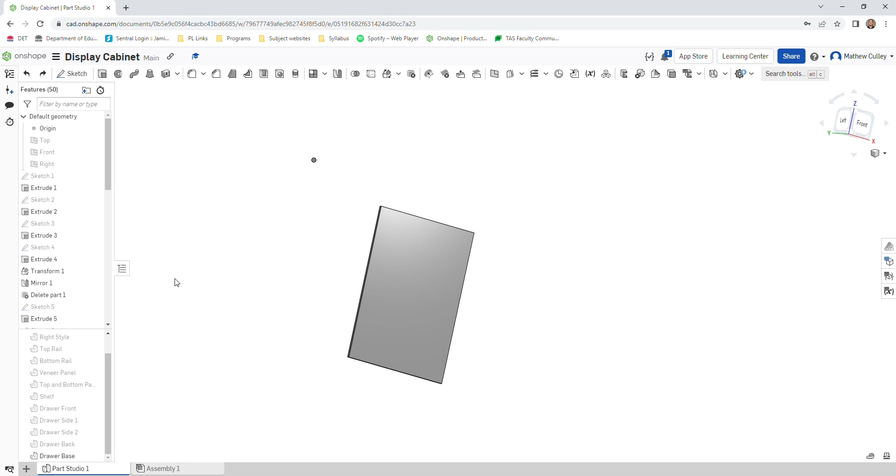Now that you've got all your parts drawn for your drawer, we're going to go ahead and start to assemble that in the Assembly Studio. So we'll jump into the Assembly Studio here.

Zoom out, just need to insert all our components for our drawer. So drawer back, drawer base, drawer front, drawer side 1 and drawer side 2, and green tick.

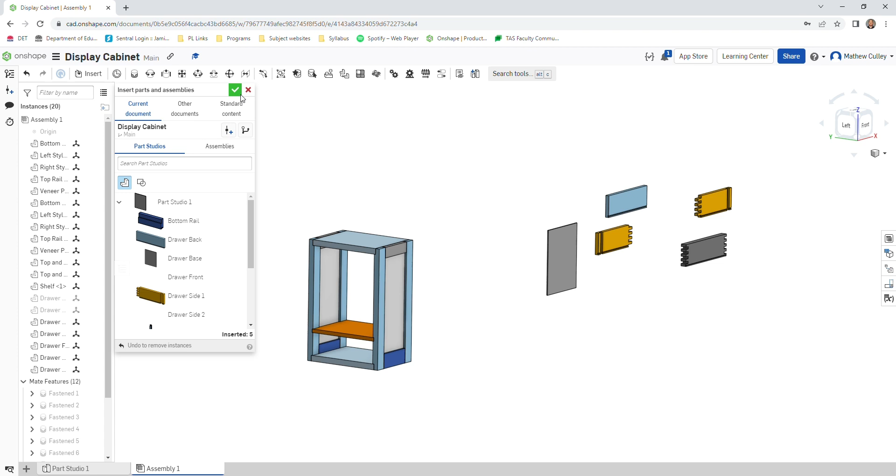Now I can already see that there is a slight issue when I look at this. I can see there's something not quite right with these housings. It looks like this one might be wrong.

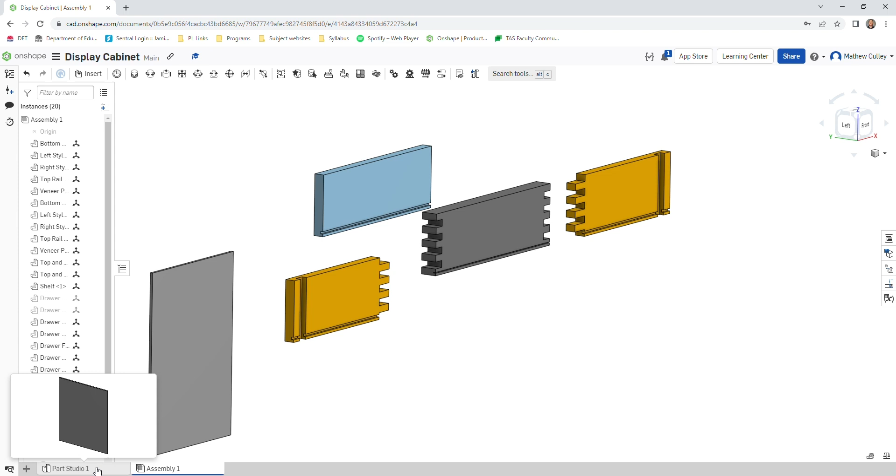Okay, so we'll just quickly, before we go ahead and start to assemble that, jump back into our Part Studio and have a look at what's going on with the drawer front there. So hide our drawer base. Here's our drawer front.

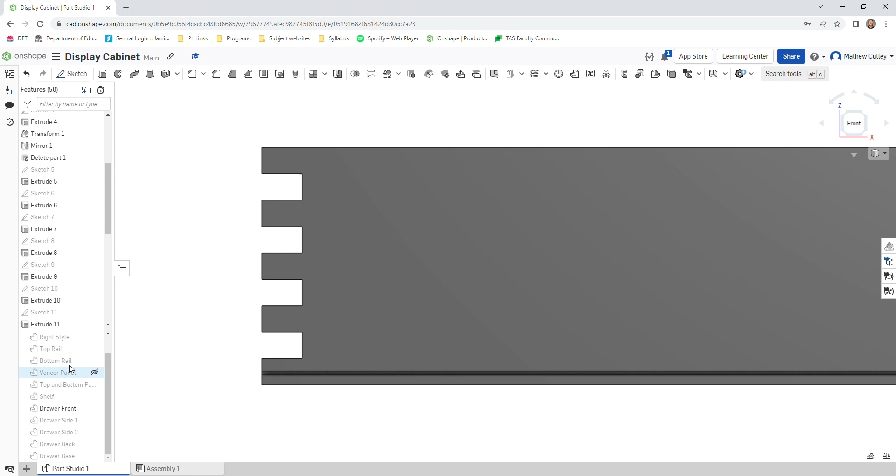We can see that this is a little bit thin, it's not quite right. So if I select my part there, looks like it's sketch 15. So I'm going to double click on sketch 15.

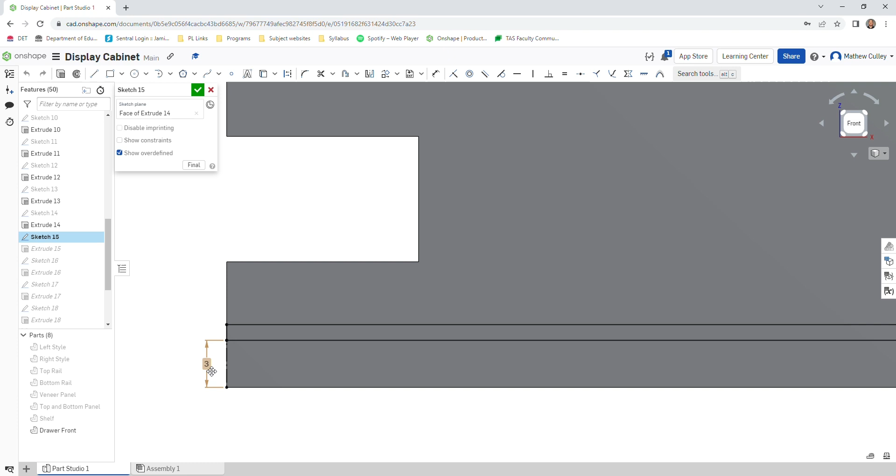I'm going to go in and start to edit this. So just going to delete these lines of the rectangle. Zoom in over here, delete.

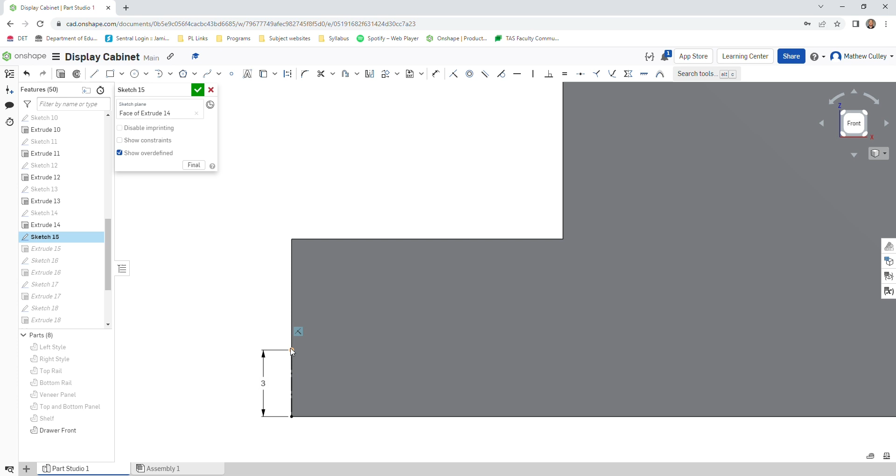Come back into my 3mm construction line here. G for my corner rectangle, left click once. Come all the way across to the other side, left click on the yellow line. 228, which is what we want, 228, enter. And we want 3mm, enter.

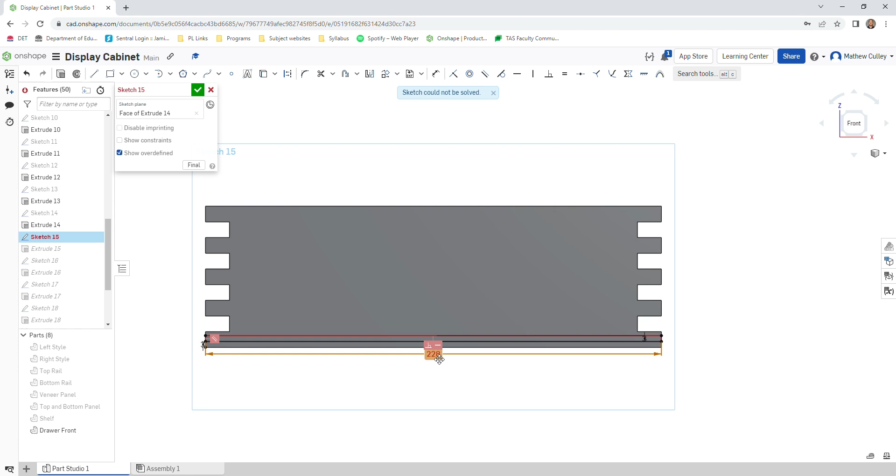Escape. Click on this dimension here, left click once, delete. Okay, it's now solved our sketch and it's saved at 3mm, which is what we want.

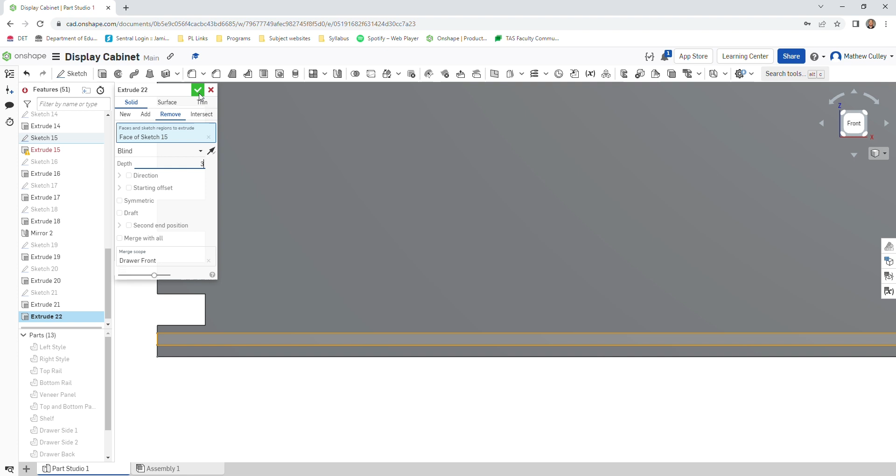So left click on the rectangle, left click extrude, remove, and we make this 3mm. Click our green tick, and there is our 3mm housing done. So we go back into our Assembly Studio now, and we can see that that housing is

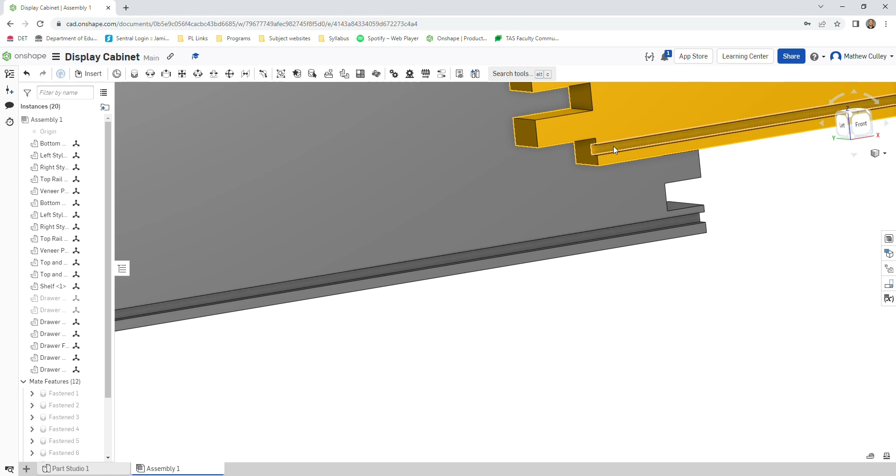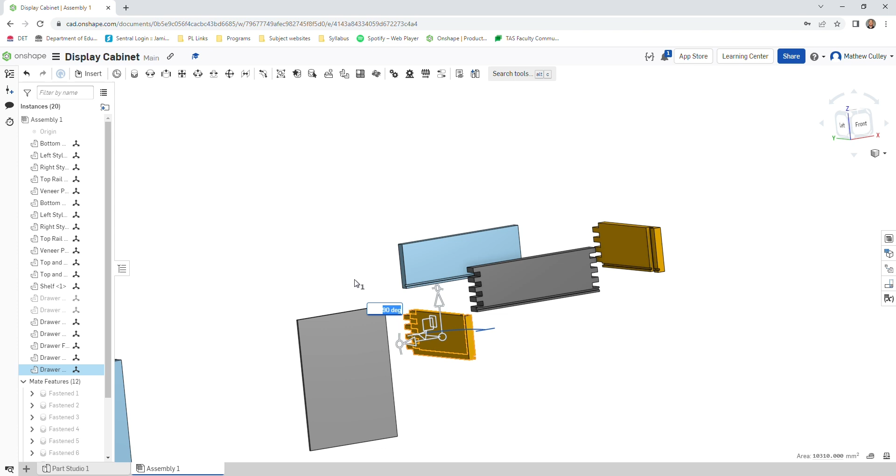roughly the same size, well it is the same size as our drawer sides. So before we get started in assembling, we're just going to quickly rotate all our parts here, just so they're orientated the right way. Just makes life a little bit easier when we go to do all the fasten mates.

So I'll just drag this one over, rotate that 180 degrees, and then our drawer base. 90. And 90. Done.

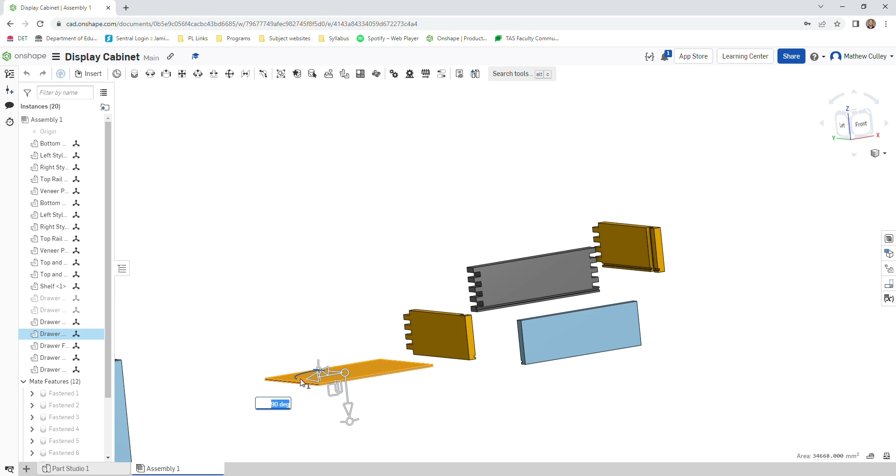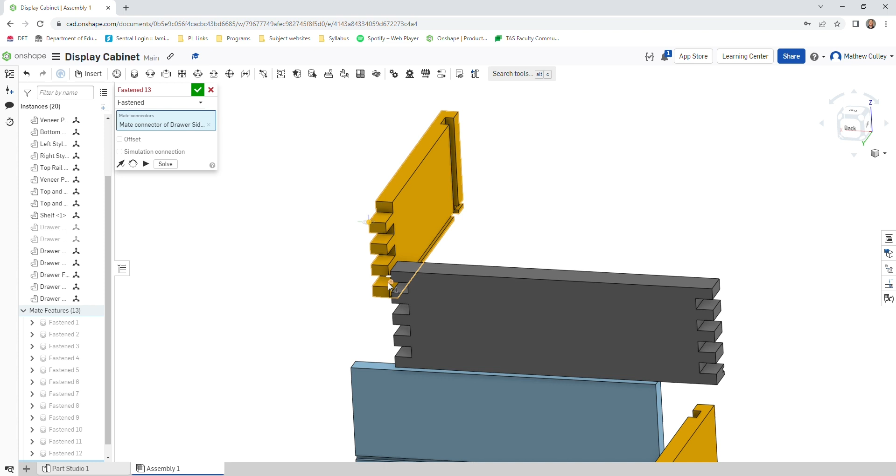So first thing we can do is M for fasten mate. Just zoom in here. We'll connect this corner here with our blue axis pointing up to this corner here with the blue axis pointing up, and solve that. We can move on to

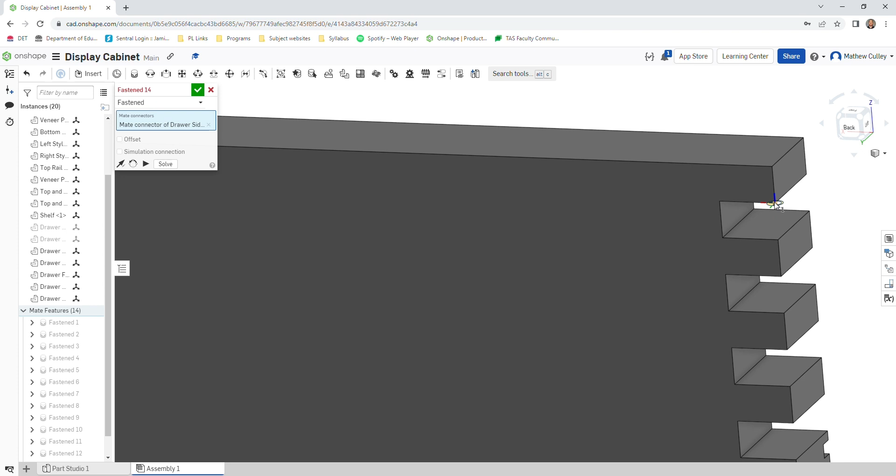this one here, blue axis pointing up, and that will go into this corner here with the blue axis up. Solve that.

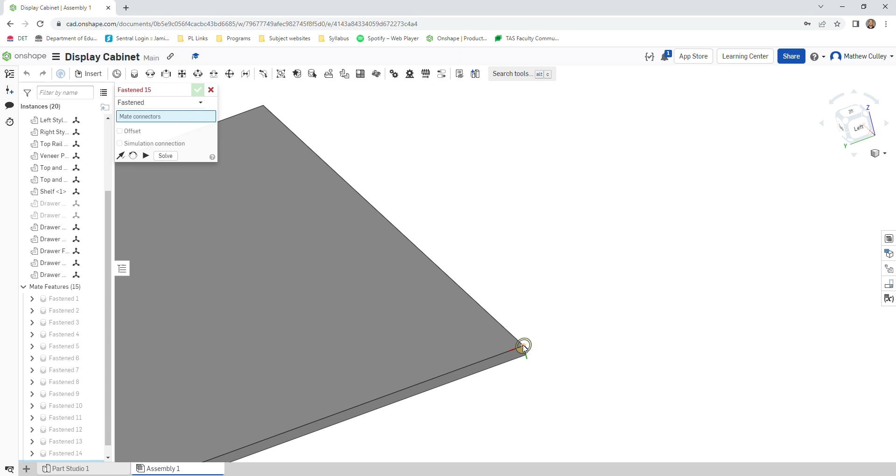Okay, I'm actually going to put the base into the back of the drawer first. M for fasten mate. Come in down here. Try and get that blue axis pointing up. And we want that in that corner there. And that works.

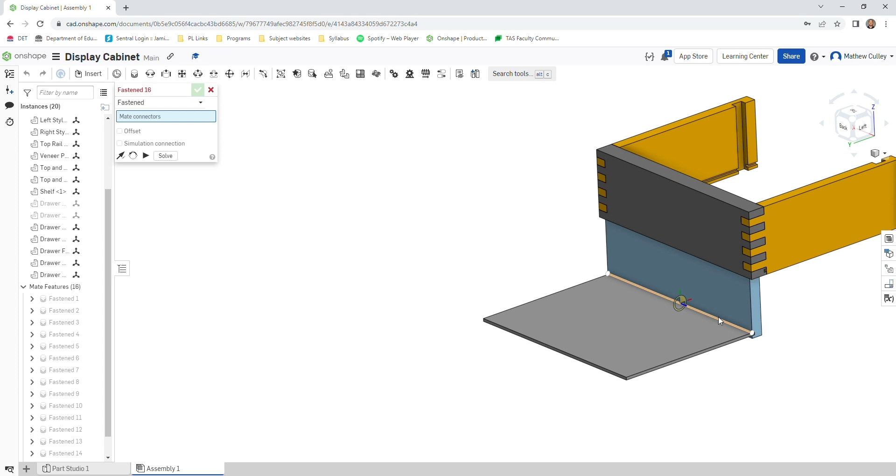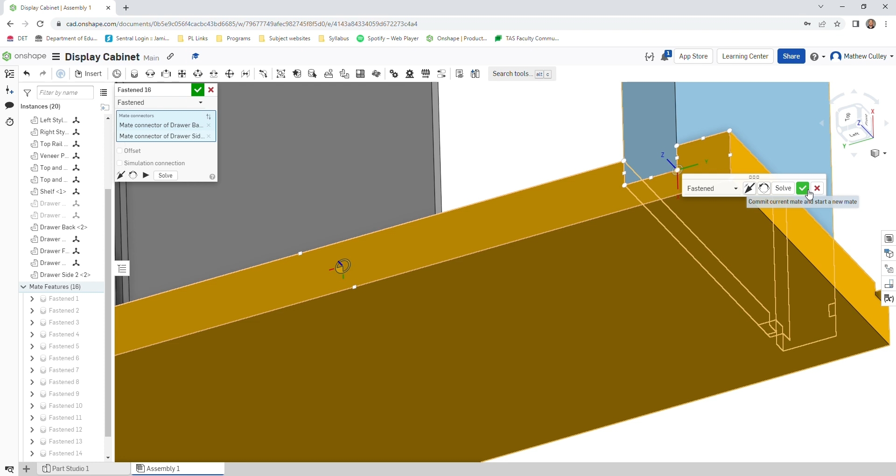Okay, and we're now going to grab this corner here. Blue axis pointing up. And we're going to mate it into this point here. Solve that. And you should have your fully constructed drawer.

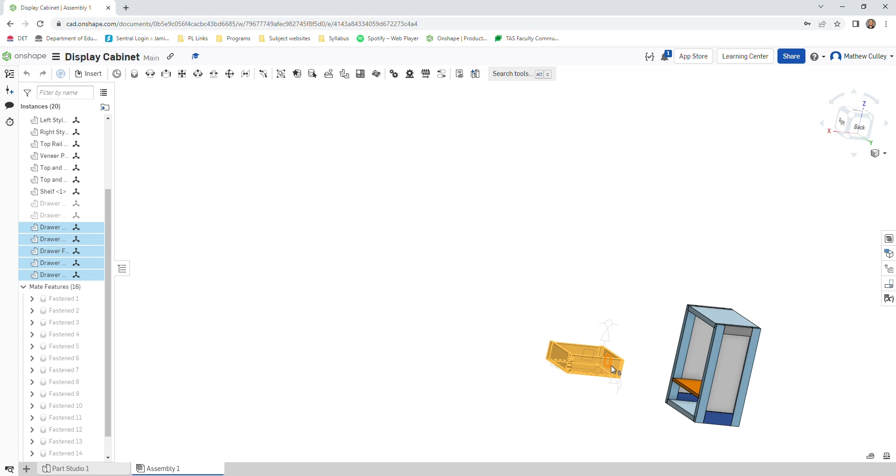Okay, we can now close that, select our drawer, just going to drag it down here into position, left click and drag down, just going to rotate. We want to rotate our drawer around 90 degrees, enter.

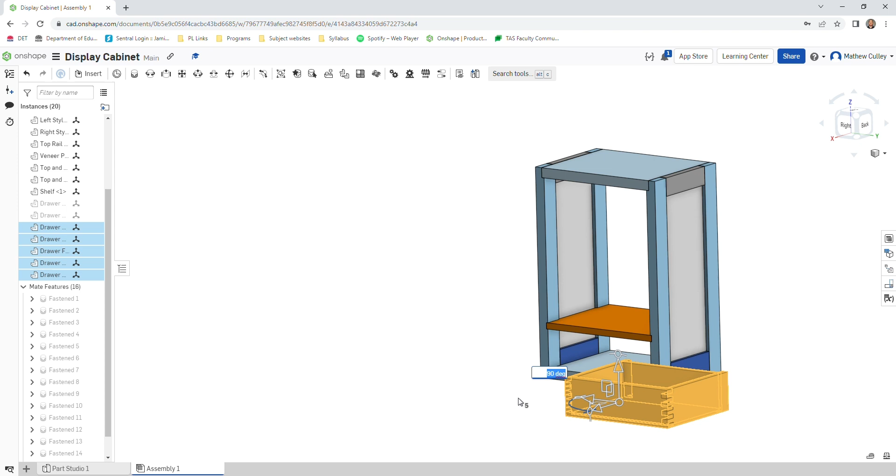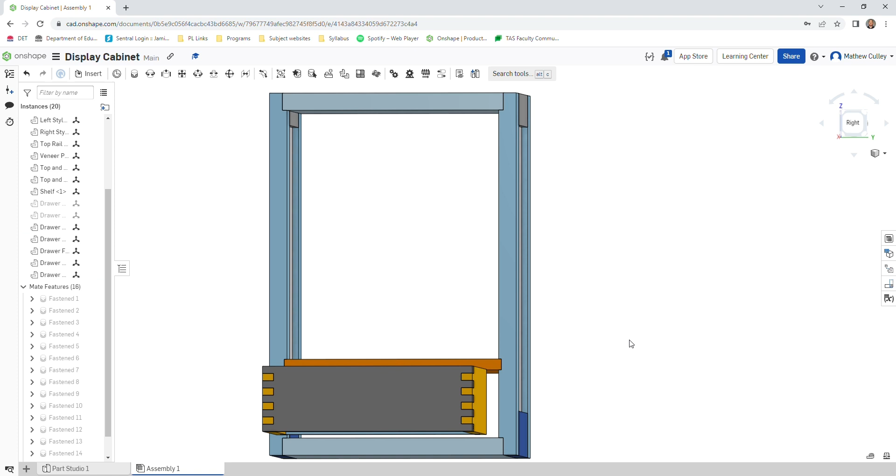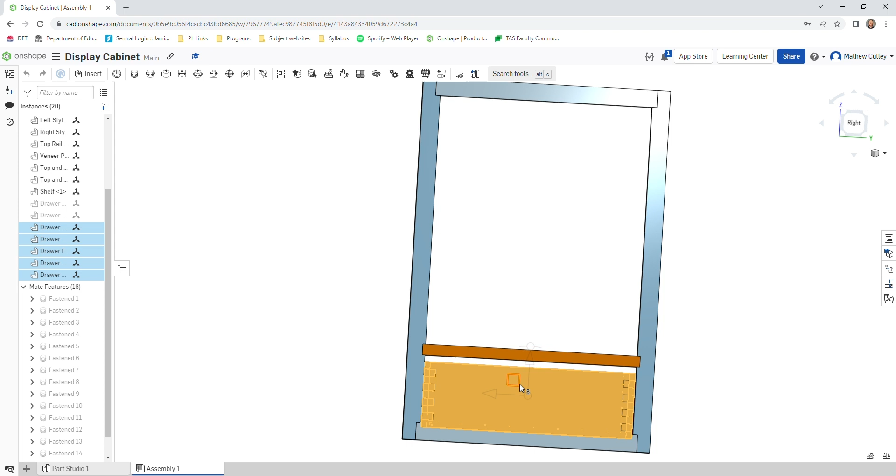Okay, and we can start to look at positioning our drawer into our cabinet. Okay, and then you have it, your drawer going into your cabinet there.